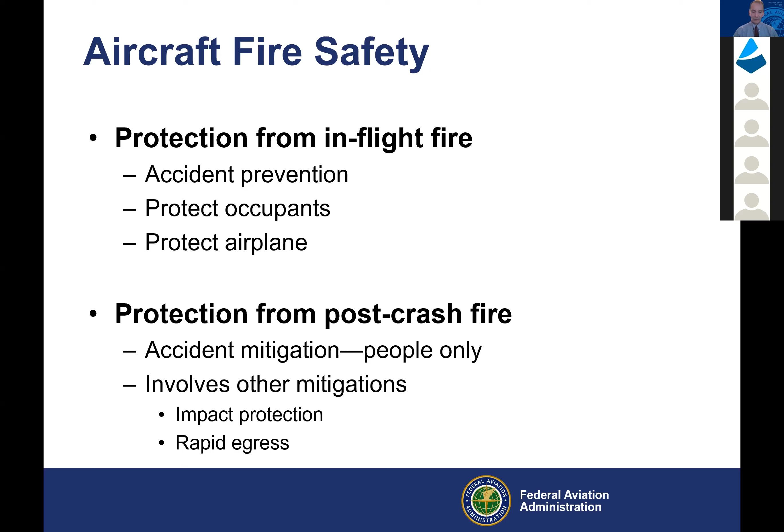And then the other aspect that we look at is a post-crash fire. So now we're kind of assuming that there is an accident, and at that point it's a mitigation strategy. Really, at that point, the airplane is not really all that critical, except insofar as it allows for people's survivability. So if the airplane is at the end of the day destroyed, that's okay, as long as the people are able to survive the accident. This then plays into other mitigations in terms of things like impact protection and the ability to rapidly evacuate an airplane.

So we looked at multiple aspects of fire safety from the perspective of how it provides benefit. The first thing is to minimize the involvement of the materials. If you can keep them from being involved at all, that would obviously be the best objective, but in the real world that may not be practical. So in that case, what we really want to do is prevent the spreading of a fire, from a propagation standpoint, to keep materials, at least try to confine what happens.

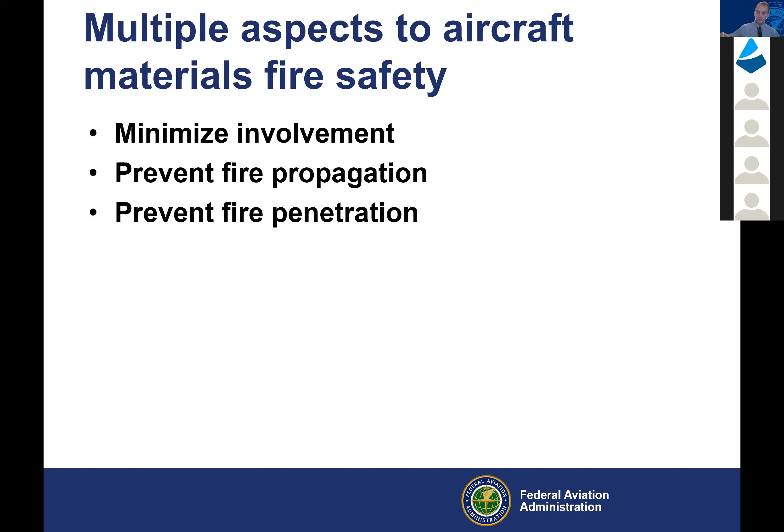So from a regulatory standpoint, there's different ways of approaching that. If you look at the current large airplane, transport airplane standards for the fire properties of materials, they're fairly specific. They have requirements to meet a certain specification or perform a certain test in a certain way. And that's, as long as you know exactly what you're going to be dealing with, and you can predict how things are going to be, that's not a bad way to go, because you can be pretty sure things will be done the way you want them to be done. But in reality, that may not be how things are.

And so there's a benefit - I don't know if that phone is audible in the background, I apologize.

But there's a benefit to having a more performance-based standard, which is to define what is the threat that we want to resist or mitigate. And we want to provide protection that's sufficient to enable, for example, time for people to evacuate. And then if we're really adventurous, you can go to a highly performance-based standard, which just basically says something like, make everything safe. And then the mechanism by which you decide things are safe is defined in some non-regulatory way. But that carries with it other issues and challenges in terms of how to standardize and how to assure that people are in fact doing the diligence that you're after.

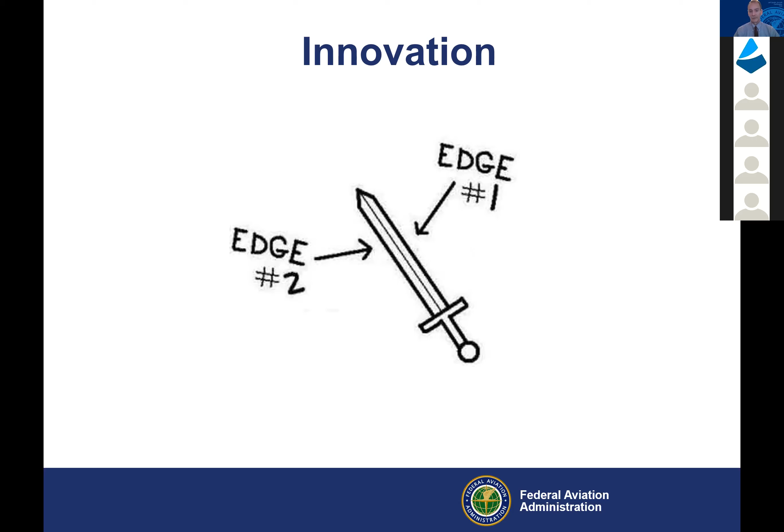So, how does innovation really impact that? There's really two sides to it. Obviously, a lot of innovation improves safety, and is in general just goodness. But the other side is that typically it means the current standards, even if they're performance-based, the means of showing that you're satisfying the standard needs to be revisited. And in some cases, depending on just how innovative something is, that can also be a pretty big challenge.

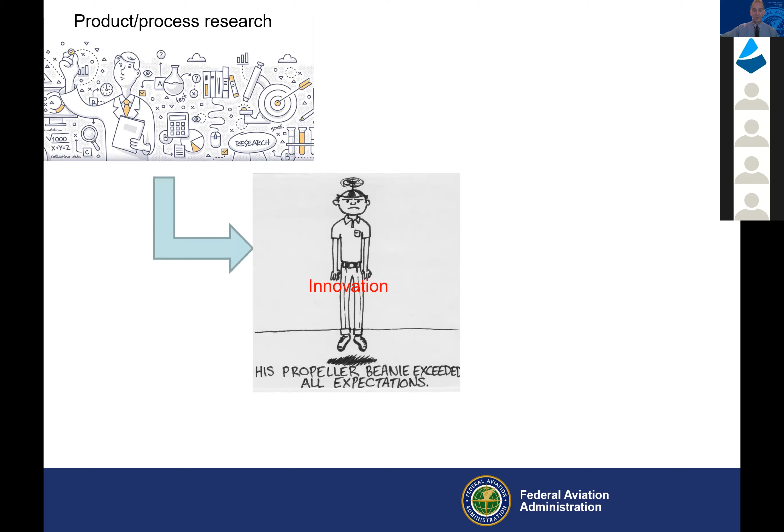So from a standpoint of how the research fits in, the typical process has kind of been that there's research on whatever the new innovative product is. The product gets developed based on that, and then there's additional work that needs to be done, and it may involve further research to develop the safety standards required to accommodate that. And that's not necessarily ideal, because the typical scenario is that the product is done by that time, and you're really trying to play catch up in developing the standards.

So ideally, we would be doing this sort of parallel process where the standards research is taking place along with the product research, and then, to the extent necessary, there can be a little feedback into that product research to help accommodate the standards that are needed. And I think in more recent times, we've had better success doing this than maybe historically. So it's something that we recognize.

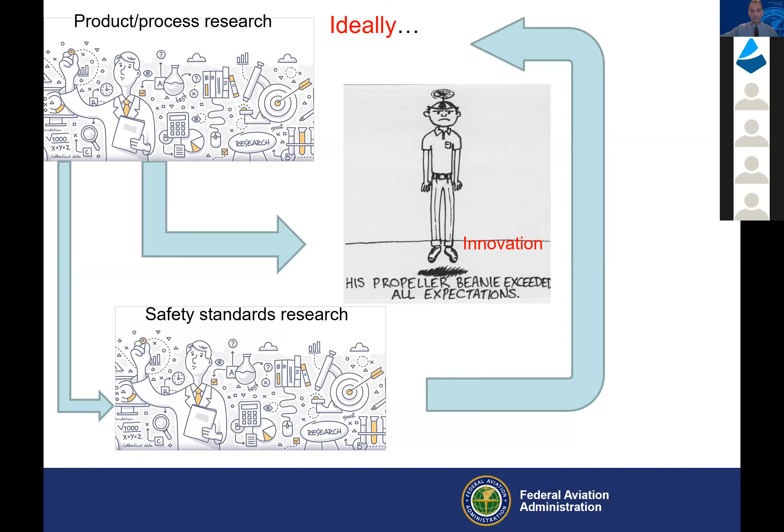It helps a lot if we can follow that sort of path. So from our perspective, the ultimate goal is to produce the right safety standards. And so basically we identify a need. The need can be from different sources, I'll touch on that in a second. We measure what the performance is that's important, and then from that figure out what the standard ought to look like using that knowledge, validate the standard, and then ultimately implement it so that it can be used and the innovative product can be taken advantage of.

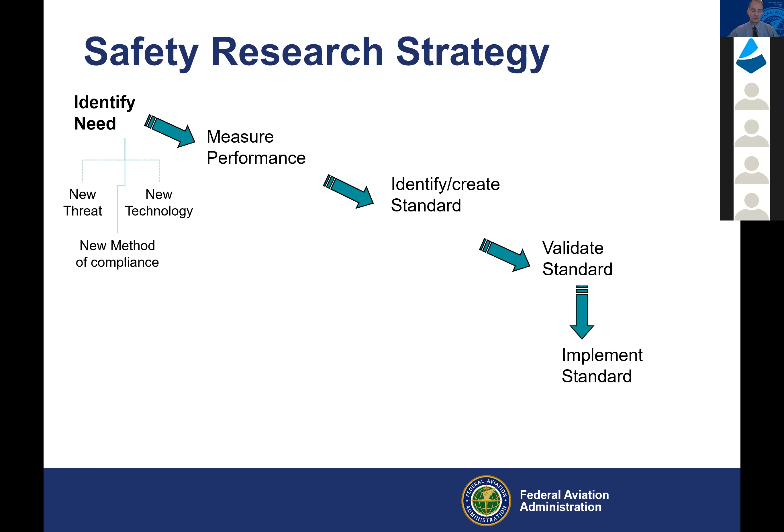This leads to some interesting choices in terms of whether the research that gets done is to meet the requirement, which is to say produce something that satisfies this specific standard, or whether it's done to meet the objective of the requirement. Sometimes those two are the same thing, but sometimes they might not be. My examples there are kind of specific, and maybe for some in the audience may resonate a little bit. But it is a little bit different, and it can be different.

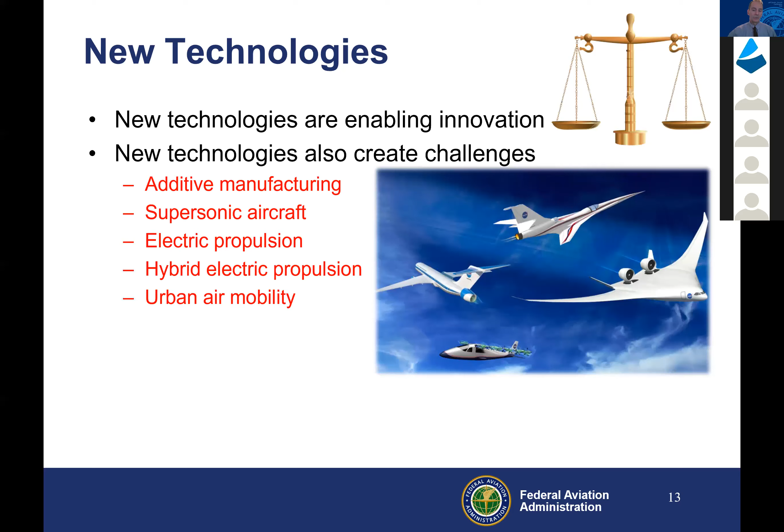Some of the technologies we're looking at that may involve changes to how we look at fire safety - additive manufacturing is an interesting one, I'll touch on that in a minute. But other things that maybe don't have quite as obvious a connection, like supersonic transports, electric propulsion, hybrid electric propulsion, and the concept of urban air mobility - those all may influence how we look at what's necessary for fire safety in the future.

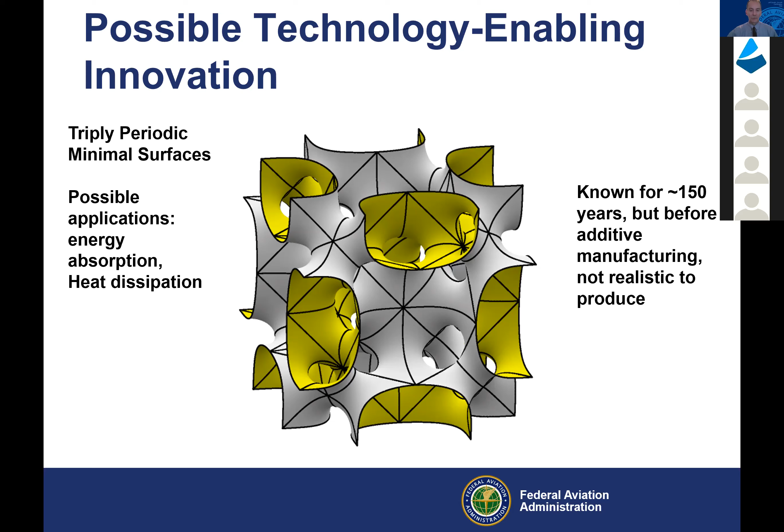I won't spend a lot of time on this because I don't have a lot of time, but I'm kind of fascinated by this whole process of triply periodic minimal surfaces, which is a mathematical entity that's been known for a long time, but the advent of computing and the advent of the ability to produce things through additive manufacturing makes them much more viable as a practical application in the structure. So what could you use them for? Well, it would seem that these things would have potential applicability for using heat transfer, dissipation, or potentially energy absorption, because you're getting a lot of surface area for a minimum amount of material. This may be something that, depending upon how the technology is applied, could be interesting. Depending upon the requirement, I'm not really sure what the coupon should look like for something like that.

New power sources. So currently we base what we think about post-crash fire protection on aviation fuel. But if we don't have aviation fuel, if we have electrical propulsion that's mainly driven by batteries, or for example fuel cells, then that might change pretty dramatically how we look at what is a post-crash fire and what is important in that case. It's the kind of thing that we may have to revisit some of the other requirements to accommodate what we now understand to be the new post-crash condition that maybe we didn't see before.

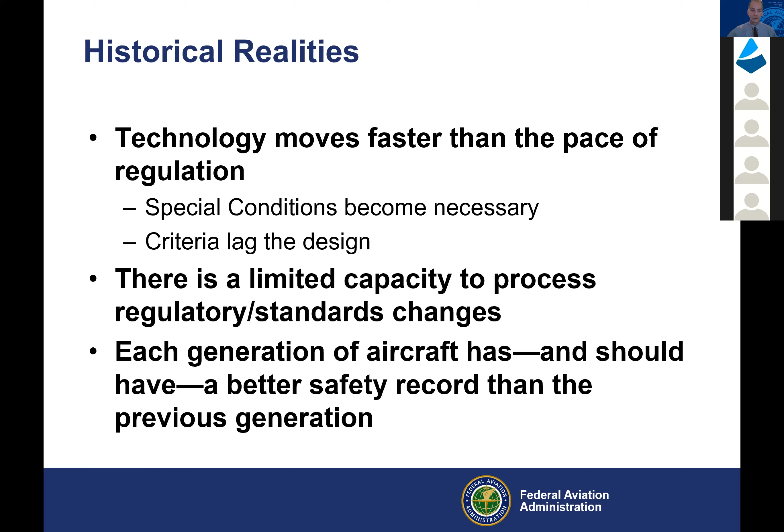In reality, technology is generally moving a lot faster than the pace that we can adopt regulations at. We can use something called special conditions, which are a regulatory tool specific to a given program. It's not ideal, but sometimes we have to do it. Generally speaking, the criteria are going to lag the design, and that's a challenge - a challenge for everybody. There is, frankly, a limited capacity to process standards changes. There's a finite amount of resources available to do that, even though we understand it has to be done. And for the most part, each generation of aircraft has a significantly better safety record than the previous generations, and obviously that's something we definitely want to maintain and potentially improve upon. So to keep up, it is definitely going to be a challenge that I think we're looking forward to meeting.

And when we look at something like this, the meter, if you will, of what is safe enough - the expectations can change in terms of what people consider to be safe enough from year to year. And I think generally we would say that people expect things to be safer than they used to be, and in fact they are.

So there's the other aspect of that, which is, okay, now we have a new mode of operation. What level of safety is appropriate for that? And that's something that's interesting.

It's very tricky to establish what is the appropriate level of safety if we have no history with it. So again, research for us is a foundational need. We look at both what we need to do and what we don't need to do. The drivers, from the standpoint of how things evolve, could be new technology, emerging threats, the state of the art technology. It may be similar technology, but just a refinement of that. And we may find service experience telling us that we need to do certain things. If we have no service experience, that makes it even more challenging.

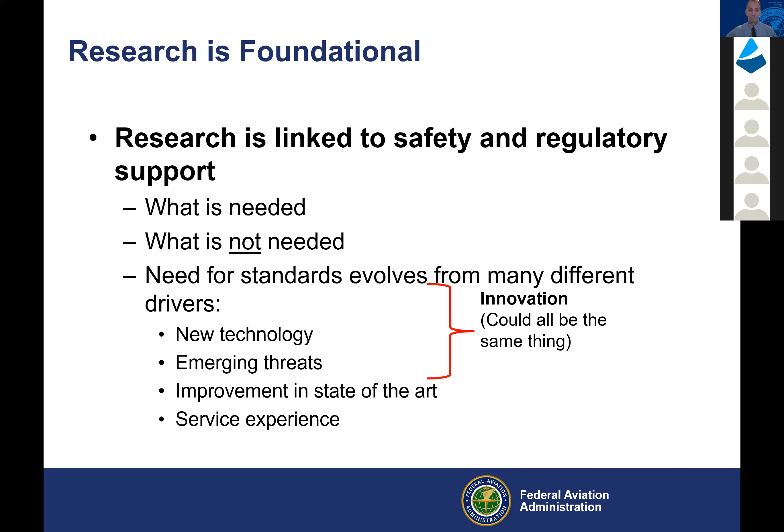So that's kind of what I just covered there, technology. We have certain things that are assumed, but they may not always be true in the future. There can be new threats, things we didn't have to deal with in the past. The environment can change. We might see a lot more air traffic, in which case the statistics will eventually shift on us. Or where airplanes or aircraft operate, if we start flying in between buildings on a relatively frequent basis, that's a different environment than what we've historically seen.

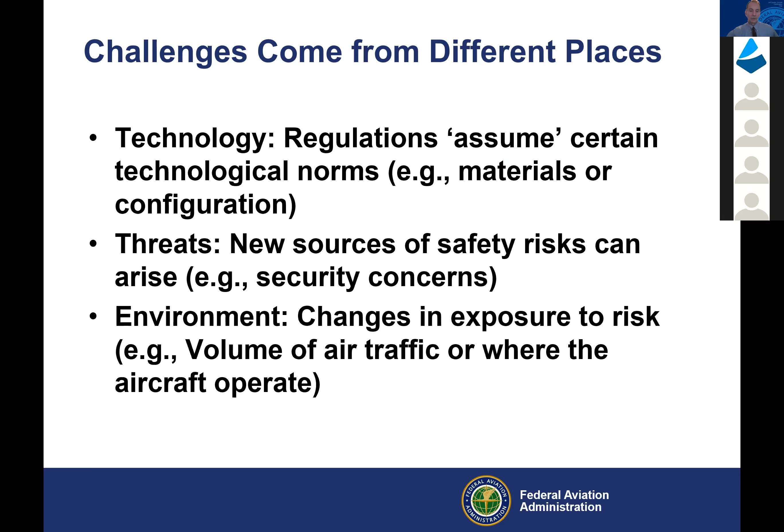So we're trying to, to the extent that we can, maintain awareness, engage, keep up with what's happening. We're attempting to move the standards so that they're defined so people know what it is they're trying to do, but they also have enough flexibility to accommodate things that change. And that is easier said than done, but it's how we're trying to do it.

And it's an international thing. This is really something we have to work across industry and with other regulatory authorities in order to make successful. It's not something that we look at as a US or FAA only activity. It definitely has to be an internationally cooperative venture. And I think I've exhausted my time plus a little bit. So thank you very much for your attention.

Thank you, Jeff. I really appreciate the overview presentation. I think we have time for one question or maybe two. So I'm going to ask you, what do you see as the biggest challenge in keeping the regulatory standards relevant in light of technological developments?

Yeah, I think it's going to be keeping sufficient detail in the standard so that it's clear that people can look at the standard and understand what they need to achieve with it, but also give it enough flexibility so that when there is a shift in technology or in the method of or the mode of operation, that it's still accommodated. We're looking at that right now to figure out the best way to do it, because we can see a lot of things coming that don't fit as neatly into what we have currently on the books. So I think it's really going to be moving us to language that's performance-based enough that it allows for shifts in these different areas, but still says enough that it's clear what the objectives are.

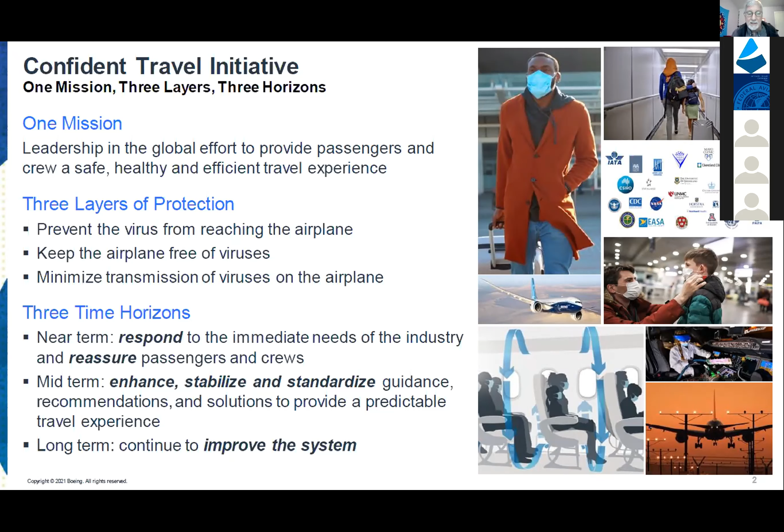This is just a single slide - there's so much about confident travel, I don't have time to cover it all. Basically, it's a more comprehensive approach to safety in air travel. There are different groups within confident travel, such as the group I'm in, looking at UVC disinfection, but we also looked at antimicrobial coatings, disinfecting solutions, and fogging. In addition, there's other things like check-in, self-evaluation, and enhanced procedures. So that gives you an idea of the scope and magnitude of what we're involved with.

Now let's talk about what we're involved with right here, which is using UVC light to disinfect a surface. What is UVC light? UVC light is basically a range of wavelengths between 200 nanometers and 280 nanometers.

We've been using this for years for surface disinfection. In fact, the 254 nanometer emission, for example by a low pressure mercury lamp, has been used for decades for surface disinfection. The issue with 254 is that the photon has a lot of energy - enough to break bonds, enough to kill viruses, but it also penetrates into tissue, specifically mammalian tissue.

What attracted us about the 222 nanometer light is that the 222 nanometer photon, while higher energy than 254, is so strongly absorbed that it can only penetrate mammalian tissues maybe a couple of micrometers at the very most. With the 254 nanometer photon, it penetrates through the membrane into the nucleus, causing DNA damage and mutagenic effects.

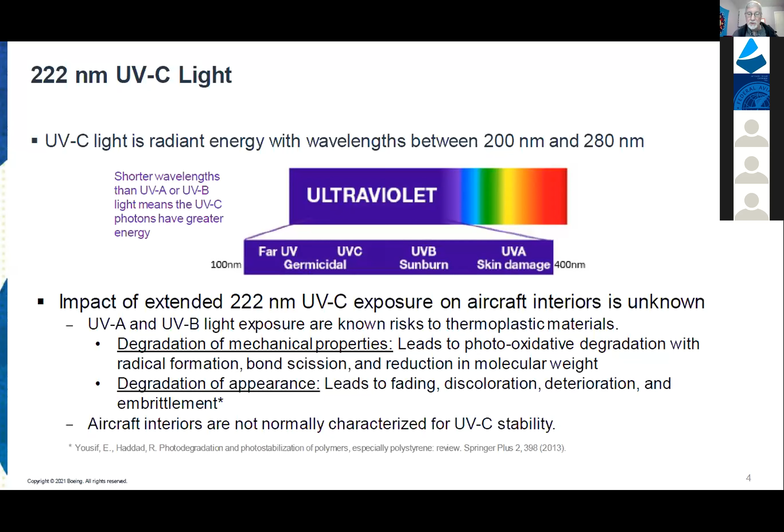So what did we want to do? We wanted to develop a system - it really is a system - to disinfect the inside of an aircraft, in particular key surfaces: galley, lavatory, main cabin, even working with the flight deck. This presentation is only focused on the main cabin, the galley, the lavatory, and the crew rest, because our inputs were basically a set of materials selected from those areas.

In addition, we worked with a very clever, very smart team of individuals who put together a robust light source with an emission centered at 222 nanometers. Specifically, it's a krypton chloride excimer lamp. We expose samples in a manner that simulates 25 years of in-service use.

And what do I mean by 25 years? I'm going to show you. We have to make some assumptions, so there's a little bit of tutoring here on various terms and meanings.

The output, of course, was: after exposure simulating maybe 20 to 25 years of in-service disinfection, what's the impact on performance - mechanical properties, visual properties, and it's not listed but I need to list it - flammability properties. I'll be talking about that.

Okay, so here's just a quick snapshot. Inside the cabin, what did we choose? Well, obviously, high-touch surfaces that might be touched by individuals and lead to fomite transmission. So you're talking about windows, tray tables, armrests.

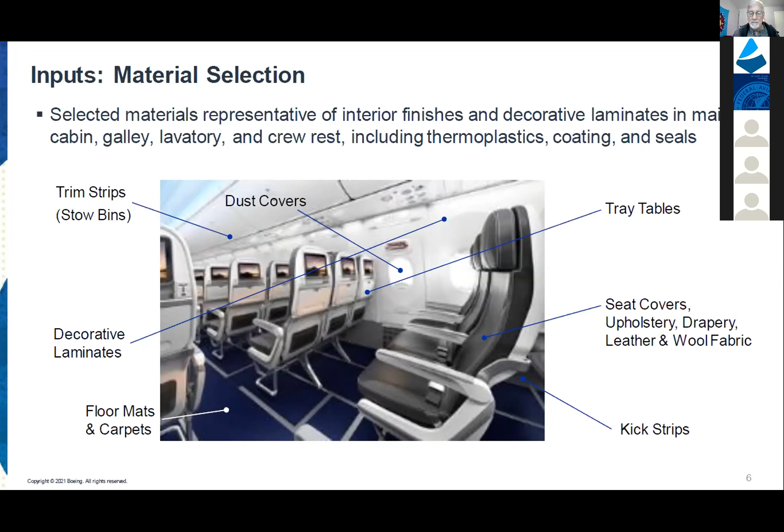Okay, so now some quick lessons on photophysics. Essentially, how do we go about a study where we need to quantify the amount of light delivered and the amount of light received?

So when you have a lamp, you turn it on, it emits light. Our krypton chloride lamps emit, and it has an intensity. Another name for intensity is irradiance. Think of that as the number of photons per second per unit area, in this case a square centimeter. So that's the amount of light delivered, and the units are milliwatts per square centimeter. Another way of looking at a milliwatt per square centimeter is a millijoule per second per square centimeter. And that's how we get to the amount of light delivered.

So assume, just as an example, that the irradiance of the lamp is 1 milliwatt per square centimeter, and we hold it over this area. Assume that dashed line is just a square centimeter, use your imagination. If we hold it over that for 10 seconds, we now have 10 millijoules of radiant energy absorbed by that surface.

This is something that we routinely recorded and measured using a commercially available power meter from Thorlabs. In our particular study, the lamp irradiance from our lamps ranged between 1 milliwatt per square centimeter and 1.5 milliwatts. We typically recorded the irradiance along the long axis of the lamp, and we had samples within roughly about 2 inches from the lamp.

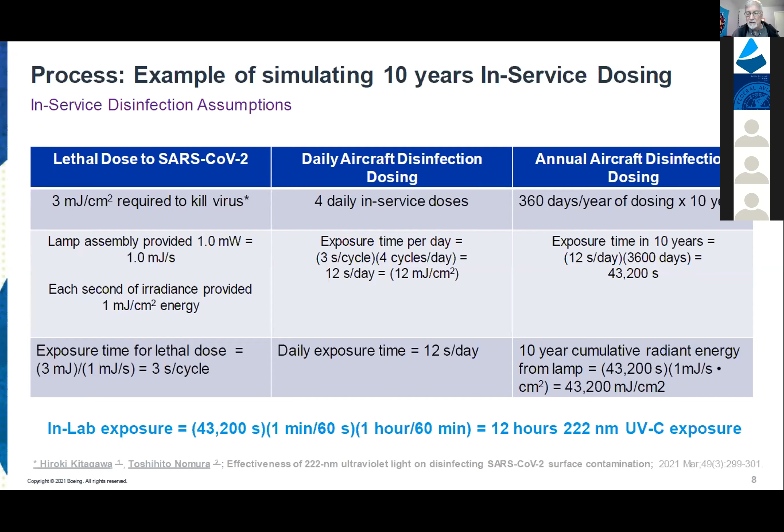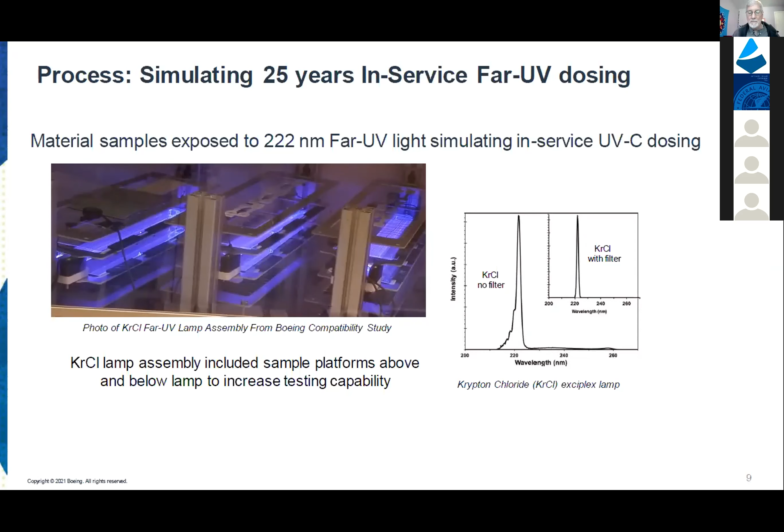Those are only 3 lamps. We actually used 6 lamps. Nevertheless, there was a lot of turnover. We tested a lot of samples and exposed them. Okay, that was tedious, but it was very, very important.

So once we did the exposure, what did we do next? We performed performance testing, and that's typically mechanical testing, such as tensile. We did elongation, we did compression. We also did things like breaking strength and abrasion resistance, such as the Martindale method for textiles.

Now I'm going to summarize first thermoplastics. Samples included things from tray tables, kick strips, rub strips, floor mats, dust covers, finishes, the lot. And what was interesting is we did not see anything. We only had one sample material, it was a polyurethane, and its compressive strength, I think, dropped a little bit. It was statistically significant, but well above the requirement. Everything else was basically equivalent. We did not see any impact whatsoever.

That's mechanical. Now for visual, we saw a range of results, everything from hardly any change where you couldn't tell to something that had gone from bright white to severely yellow, almost brown. And then flammability was my biggest concern because, as you know, in the additive industry, you add these, basically they're going to be throughout the sample. And I worried about oxidative degradation and the impact of oxidative degradation on additives that are at the surface. How would that affect something like vertical Bunsen burner on a sample that normally would easily pass?

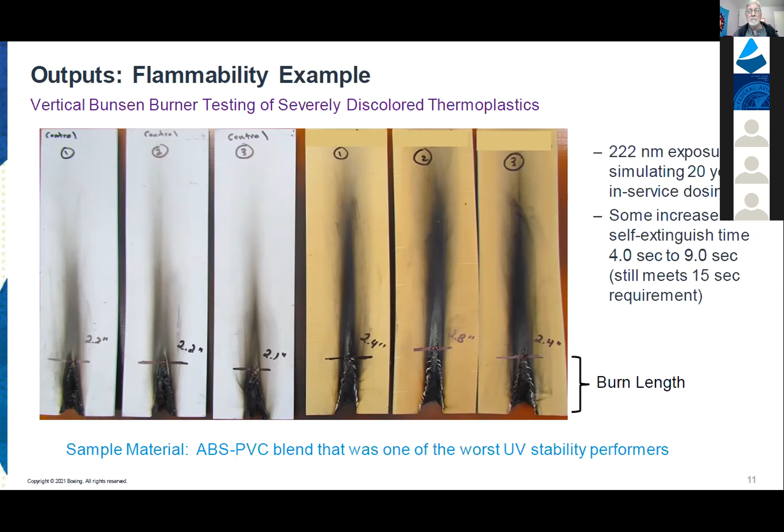I think on the right you're going to see something like 2.6 average, roughly. We did this at 20 years here, and we did it again at 30 years, roughly the same. On the left-hand side, that was the control without any exposure, roughly around 2.2 inches of burn length. The self-extinguishing time did become longer: it was 4.0 seconds on the control, and it was 9 seconds on the one that had been exposed. I think we did have one that was 7 seconds, but also on that second test at 30 years, I think the controls actually self-extinguished almost right away. So there is a little bit of a difference there. Nevertheless, there's still a fair amount of margin between the requirement and how they actually performed.

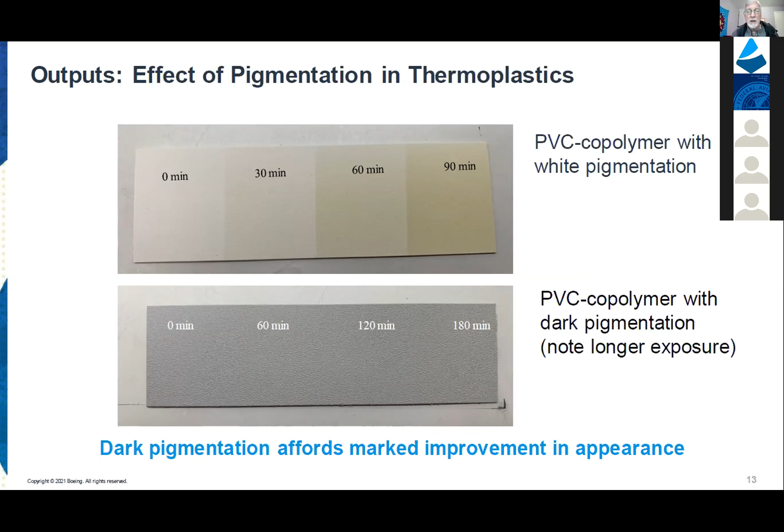If you take that same tray table material and you incorporate a dark pigmentation, look at the change. We even doubled the exposure times. We wanted to see what the rate was over a short period, and that's why this slide is in there. You can really see that on some of the really fast-acting, fast-degrading materials, it's pretty significant. But the surprise was the impact of dark pigmentation, which when I thought about it makes sense because it's probably absorbing a lot of the extra light.

Textiles, I have to show one slide just to say we did it. Again, no impact that we could find. We accidentally ran a sample out to 168 hours, and that's the abrasion study on that seat fabric. So, unless you... yeah, I can't find anything. Basically, we shot at it as many times as we could, we couldn't really destroy it. So that's a good thing.

So, recommendations going forward. Well, we still are looking at flammability. We're actually now working in a collaborative effort with the IUVA on a large group of companies looking at a more fundamental study, maybe even a slightly wider group of polymers. Our first phase will be basically polymers without pigment, and then we'll do the pigmented stuff that's being used. So stay tuned on that, that's ongoing.

But we also have to look at this as an opportunity. We need to work with the industry to maybe look at ways to make some of our real good thermoplastics more thermal stable. So that's something that we're going to need if we adopt this method and it gets used with some regularity.

The other thing is for our designers here at Boeing, I'm saying, look, if at all possible, if you can design parts using the PVF, the polyamide, the nylon, or the polypropylene, if there's not an issue with flammability, and there can be, but on some applications you only need to meet vertical Bunsen burner, and so that's good. PVF is never an issue, but let's use those if we possibly can.

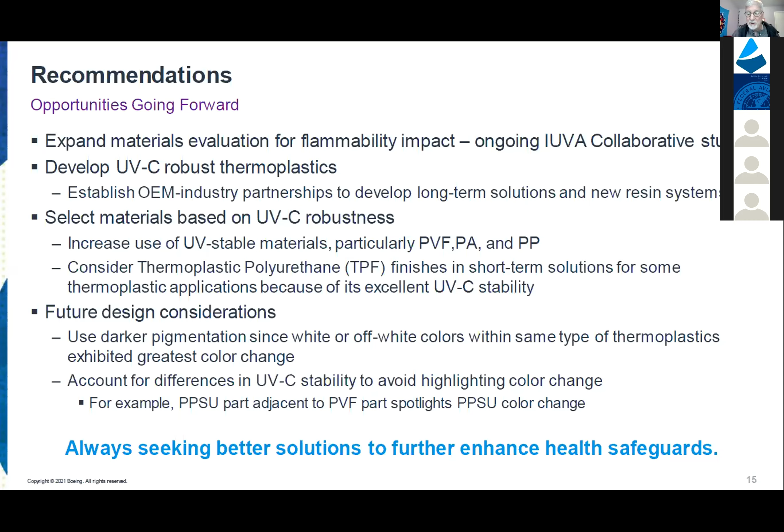All right, so I'd like to introduce our next speaker, Tom Fabian. He's the Global Technical and Innovation Manager at Underwriter Laboratories, and he's going to be discussing a very interesting topic: influence of 3D printing on safety critical properties, FR and electrical testing parameters.

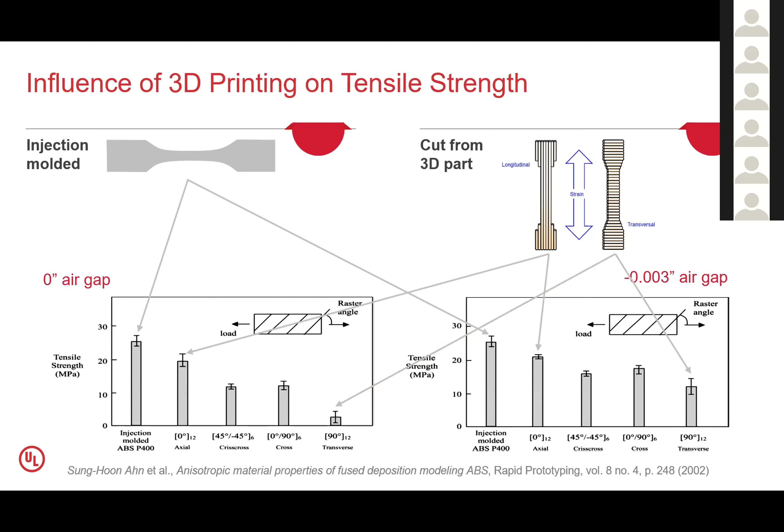If we see this showing up in mechanical properties, what happens with flammability, where surface roughness can lead to greater attachment of flame? In the channels created between the deposited lines, could that act as a chimney and accelerate flame growth within the interior if it's breached? That's really where our questions were coming in at UL: how do electrical properties, ignition properties, and flammability properties of 3D printed materials compare to injection molded parts?

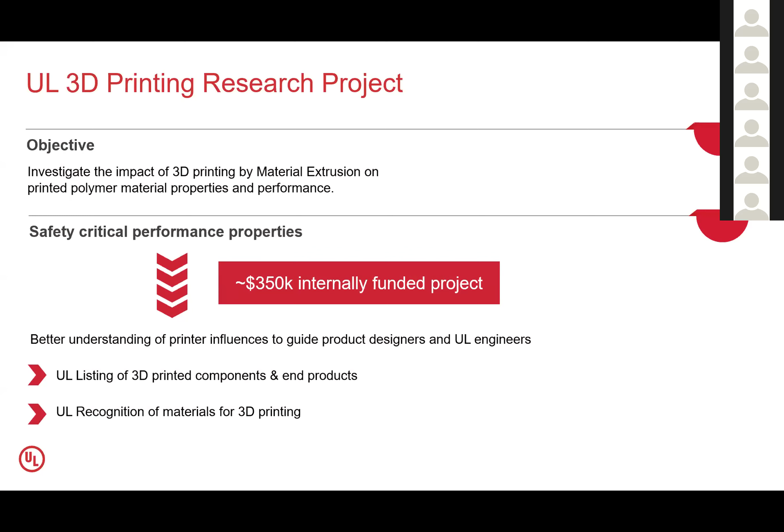So we set out to do a study looking at these aspects internally—an internally funded study. We wanted to understand how those properties are impacted, and what that means in terms of material recognition programs and product certifications, and how we extend from traditional manufacturing to 3D printed.

To provide an overview of our research, we focused on two materials that we could find. We found a flame retardant modified ABS material marketed as a V0 rated material, and we used a $4,000 desktop printer for printing that material. We also looked at polyetherimide, an inherently flame retardant material frequently used in aerospace, which requires more control and more severe conditions to print than ABS. So we used a $45,000 industrial printer.

We wanted to focus on the key factors a user can adjust—not all the different factors that impact 3D printing, but just build orientation (the direction we're printing), raster angle (the angle of adjacently layered materials), air gap (how close adjacent deposits are placed), and layer thickness, using the tip size of our material extrusion 3D printer to guide that. We looked at a full factorial, centered design of experiment to examine these different factors.

We took it one step further, taking our filament to our lab, chopping it into pellets, and then injection molding those pellets. So now we've got injection molded material made from the same feedstock as our 3D printed filament parts. We then looked at a number of different electrical, ignition, and flammability properties: dielectric strength, volume resistivity, comparative tracking index, high current arc ignition, hot wire ignition, and UL94 flammability.

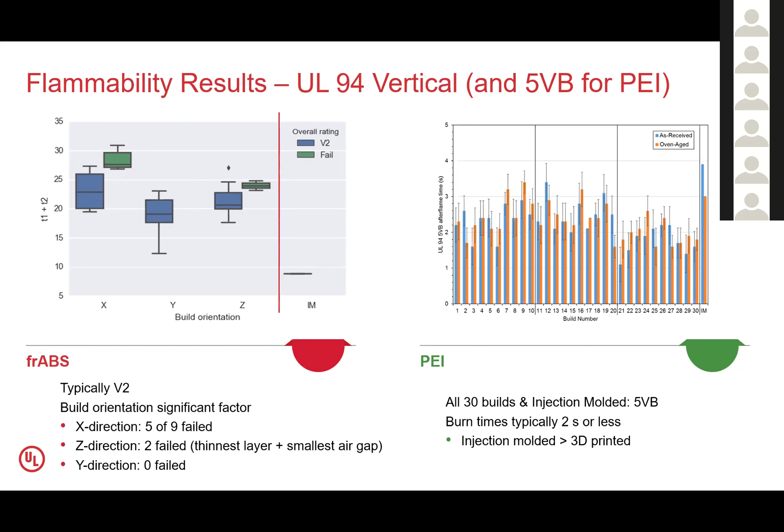What we believe is happening here is that the greater surface area of that 3D printing is allowing the imide moiety to interfere in the combustion kinetics at a faster rate than in the injection molded smooth sample, and that's where we're getting a slightly shorter burn time. Compare that to the ABS samples where that greater surface area is allowing that inherently flammable material to burn at a faster rate. So again, build orientation is a significant factor though.

When we look at high current arc ignition, this is simulating between two live components, there may be some arc occurring like a switch, for instance. So we're looking for up to 150 arcs being subjected to the surface of the material - will it cause the material to ignite? We found with the ABS material, regardless of how we printed it, or if it was injection molded, none of our specimens ignited. So they all get the best rating, best performance level categorization, which is great.

With the polyether imide, again, we saw a very similar type of behavior. Out of the 150 specimens that we tested that were 3D printed, 3 of the 150 did ignite. Again, it was at such a high number of arcs occurring that it still leaves that print as being considered the best performing category. So we can look at 3D printing where it was significant on flammability tests - on a high current arc ignition test, we don't see a significant result impacted by 3D printing.

If I look at hot wire index or glow wire index as being a similar type of test, where we're applying an energized nichrome wire to our specimen and looking for the time to ignition, we are again starting to see results. All of our ABS samples, probably not too surprising, melt and drip away from the nichrome wire, so it would, by definition of the standard, get the best result.

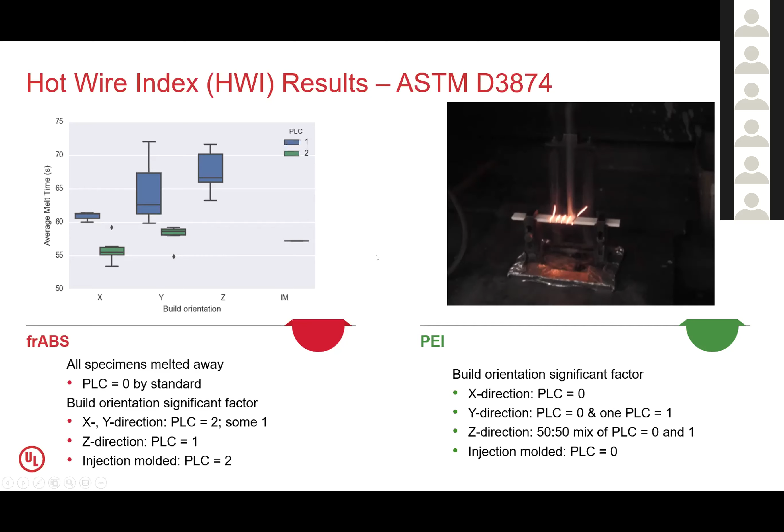Now it's really starting to say it depends on how the parts are being printed that are going to be used. So again, it's a very critical question that's coming up. So I'm going to jump to comparative tracking index. This is a test where the surface is being contaminated and we're looking for potential arcing to occur, or tracking from one live element to another live element, or in this case, electrodes.

Nominally, this test is conducted on a smooth surface that is free of surface imperfections. When we look at many of our 3D printing techniques, you have an inherent surface texture that is being put onto that material. How that surface texture can impact the results of this test comes about by the liquid that is being dropped between these electrodes to create that tracking bridge.

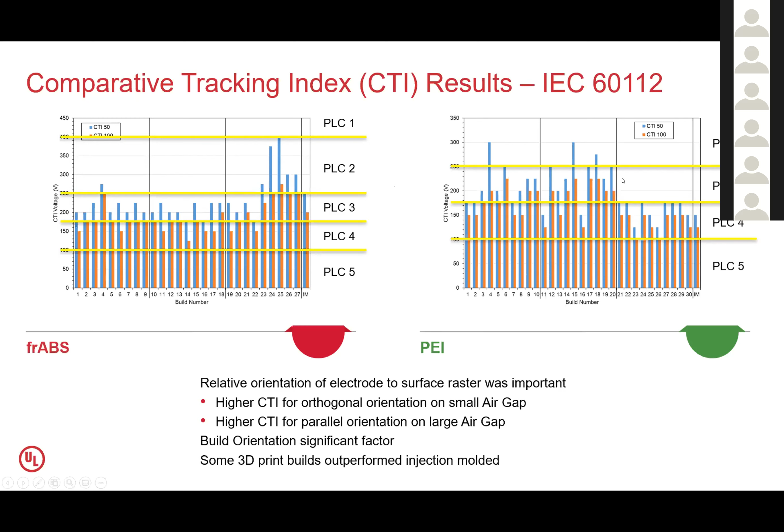So I'm going to try and summarize here. First, we do see injection molding does give us more consistent dimensions than the 3D printed, and this makes sense from having a fixed volume cavity versus an open volume build.

If you don't take anything else away, this is probably the most critical one: the build settings do influence the results. That same material on the same printer can yield critically different performance. We saw that with the flammability, with the comparative tracking index, with volume resistivity, with dielectric strength, with the hot wire ignition. In every case, we're seeing that if I take that material, I can alter my performance depending on how I print it.

So that becomes really critical and has a big impact when we look at what does this mean for products that are being 3D printed and how should they be assessed for safety.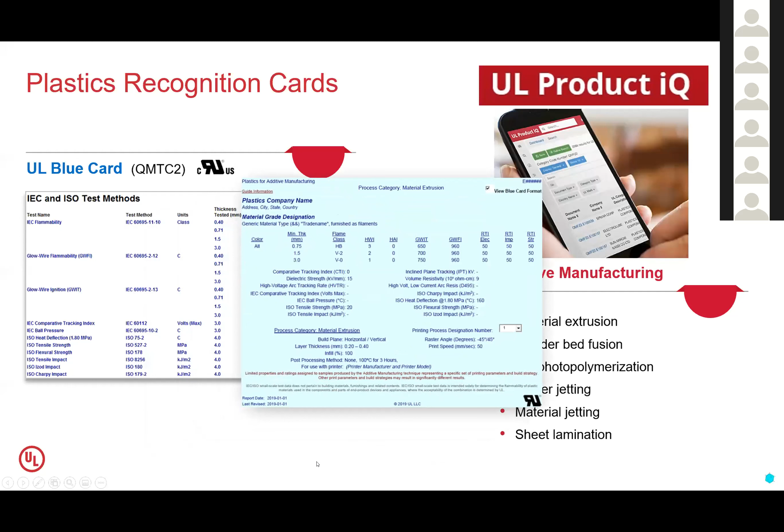I list out the 6 different techniques that are used for plastic materials, and I'll give a brief overview of what a blue card captures to serve that same function as the yellow card. Just like the yellow card, we're still keeping the plastic and the grade name and the performance characteristics all in the top portion. When we get into the bottom portion, now is where the difference is coming in.

First, we're indicating what processing technology is being used for 3D printing. The different techniques will rely on different aspects. What are the user controllable parameters that are being used to make these samples that are evaluated? The build plane, the layer thickness, the infill, the raster angle, the print speed. These are all settings that you as a user can typically alter when you're printing.

Finally, is any post-processing required? Material extrusion, you might not need post-processing. Vat photopolymerization, if you don't do post-processing, you're going to end up with a gooey mess at some point.

Finally, I mentioned the model printer. Printer models do matter. We have found that even when we use the same parameters and the same material, we will get different results depending on the model of printer because of how they work. So that becomes a significant factor.

So the end result of what we're capturing on a blue card is: if I use this grade of material on this printer and I use this printing parameter combination, then these are the results that can be expected. So we're going back to the same purpose as what the yellow card serves, of being able to predict what the properties are to allow the engineers to use those properties for their design purposes.

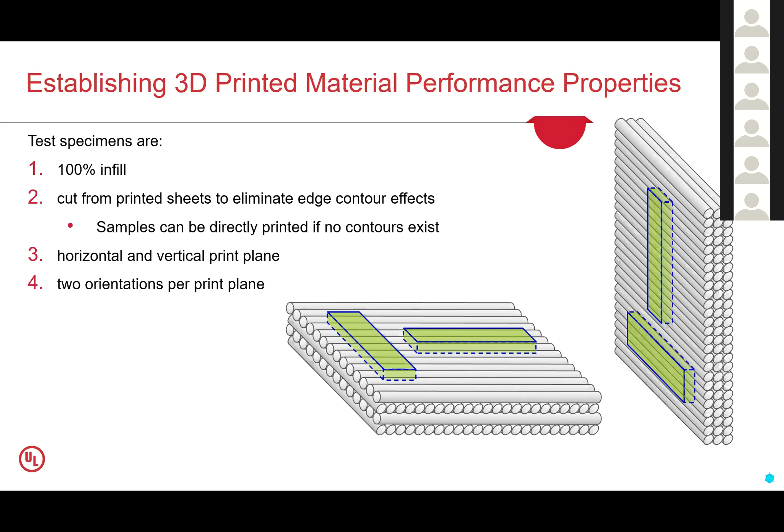So now that we have a nice technique for capturing that information, we can go into looking at how we certify a 3D printed product or component. First, we have to acknowledge that ultimately it's the performance of that component that matters. It doesn't matter how we made that component, but whether that component is performing. So the performance requirements are the same, whether it's 3D printed or made through traditional manufacturing.

That does not change. If the material has been 3D printed using a blue card recognized material, we can ascertain whether it was printed using the same parameters and model printer as what's listed on the blue card, in which case we can expect that performance as reported on the blue card, and it can be assessed based on it. If not, we treat it just like any other injection molded part using an unlisted material, where we're going to do the material performance test also.

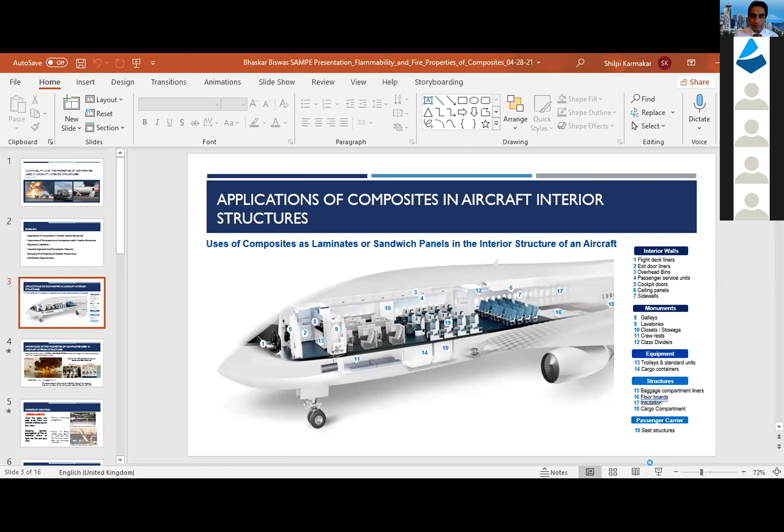So, if an aircraft catches fire and the fire has somehow got slower propagation, then it may allow time for passengers to evacuate. Therefore, the overall aim for the present manufacturer is to improve fire resistance of aircraft through preventing ignition and propagation of fire. Before I go into details, I would like to give an overview of the presentation.

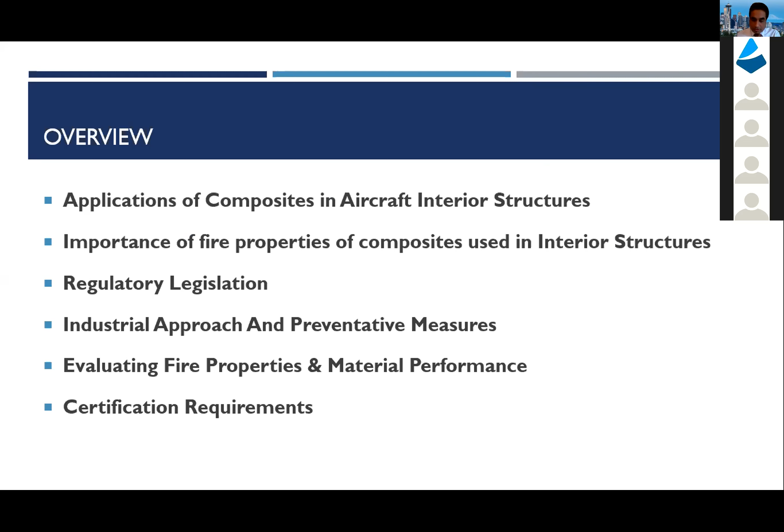Now, the first one: application of composites in aircraft interior structure. Since composites are known for high strength-to-weight characteristics, application of composites in aircraft has been growing significantly in order to improve fuel efficiency. As can be seen from the current slide, composites are used in interior walls, monuments, some equipment, some structures, and in passenger carriers. Here are some examples for each application. As you can see, composites are widely used in aircraft.

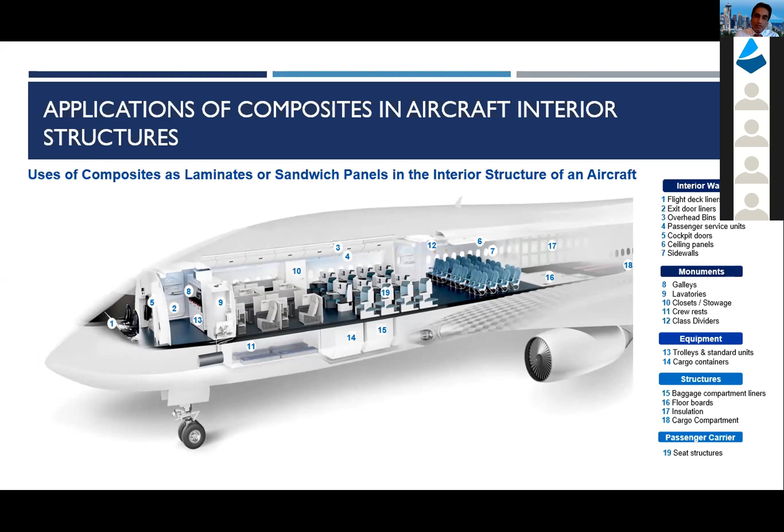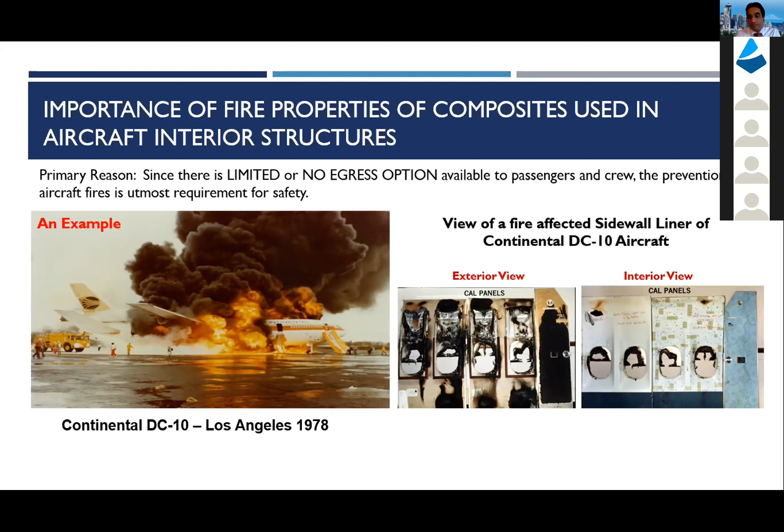As learned from many aircraft incidents that happened due to fire, an important control for reduction of the effect of fire is to delay ignition and propagation of fire, so that it will allow time to fight the fire and save lives. So, two prerequisite missions are taken into consideration in order to improve fire safety.

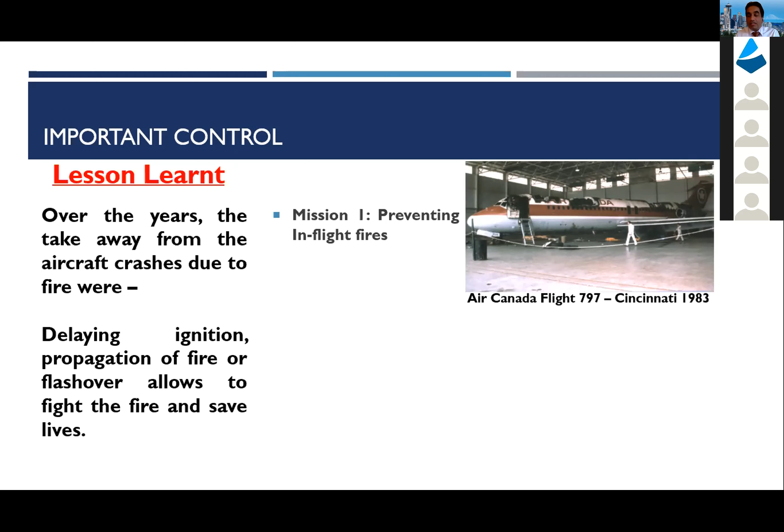So in order to pursue this mission in practice, enforcement was required to make sure all the components are safe, and that has to be done at the manufacturing level. This has led many aviation agencies to come up with regulatory requirements. Agencies like the federal government have come up with legislation through Code of Federal Regulations, where Title 14 CFR covers aeronautics and space, and part 25 of that CFR includes the regulation for fire safety.

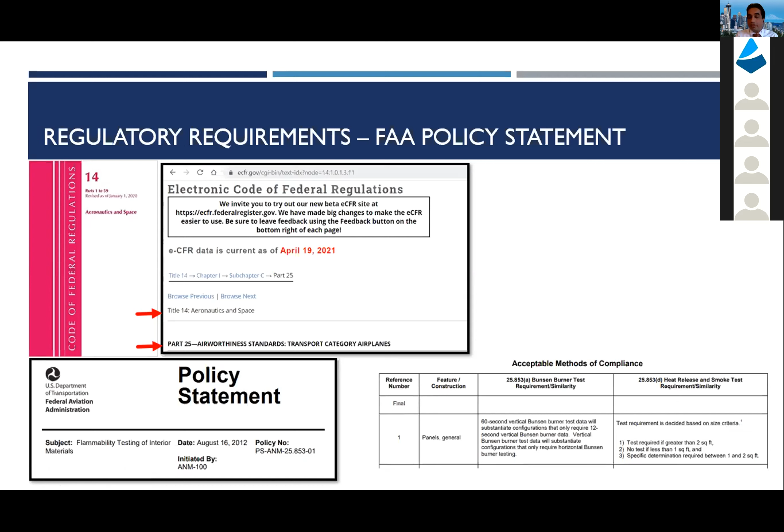So in order to support the regulation and support the manufacturer, FAA also came up with a policy statement, which is a method of compliance, and it dictates how to meet regulatory requirements. Here is an example of a panel. The policy statement says the panel must pass the Bunsen burner test, and also it has to meet heat release requirement and smoke density requirement. Similarly, there are other 25 components used in aircraft, and the policy statement gives details for each of them on how to meet this requirement.

Since the regulatory requirement is stringent, industries had to take pragmatic approaches to meet this requirement. The very typical approach is to use materials that are inherently fire retardant, typically phenolic resin and composites made from phenolic resins. Also, by selecting materials that have a higher autoignition temperature than service temperature, and by using non-flammable material where possible. Sometimes it is possible to mask components with fire retarding material, and also sometimes it is done through changing design that allows a reduction of fire-prone material. And the last one is to impart fire retarding characteristics to non-complying polymeric material using fire retardant chemicals.

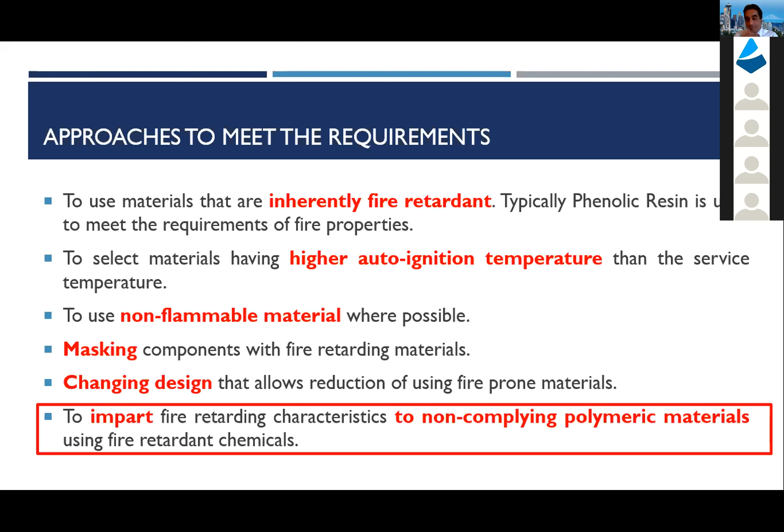And this one is very important because there are some polymers which are very demanding and cannot be used in aircraft because of the lack of fire resistance property. And for those polymers, these steps are taken in order to improve the fire resistance properties of the material.

So as mentioned in the previous slide, industries do fire retardation of materials, and the reason for that is mainly three reasons. The first reason is it provides thermal stability to the material, meaning resistance against heat generated from fire. The second one is it helps to hold the integrity of the composite, meaning it may ensure the material doesn't degrade, disintegrate, or fall off. And the last one is isolation of fire in order to reduce the intensity of burning.

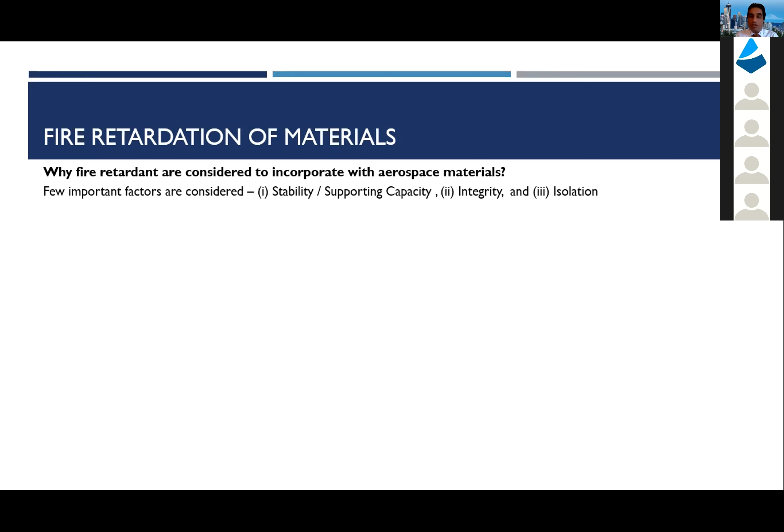There are different types of fire retardant, and it is not easy to select which one to use for the material. That's why sometimes it is difficult for industries, and industries come up with a strategic process, which is the material selection process and process selection process.

The very first process industries take is the material selection process. In this selection process, the first consideration is fire safety of the material, then manufacturability of the material in order to ensure it can be processed consistently over time. The third one is component specification to ensure it meets all the design requirements. And the last one is customer specification to ensure any additional requirements from the customer are met.

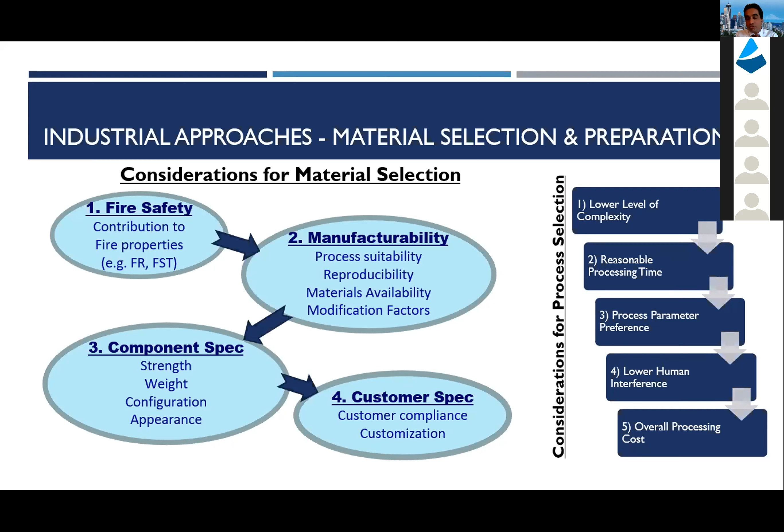Upon completion of formulation and modification of the polymer, it is important to ensure which test technique to be used for the assessment of fire performance of the material. The current slide shows there are a number of tests that can be used for assessing fire performance of material.

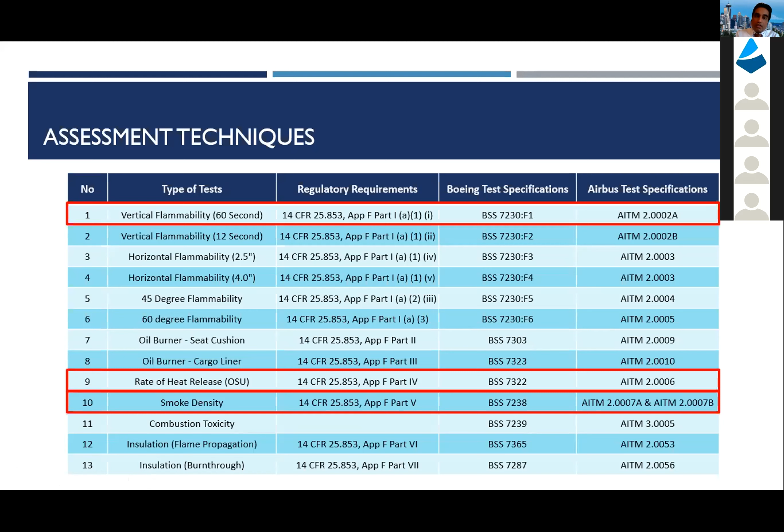Here are the types of tests, and each of these tests complies with respective regulatory requirements. OEMs like Boeing and Airbus have their own test specifications, and each of these test specifications meets respective regulatory requirements. For composites, there are mainly three tests used: the 60-second vertical burn, OSU heat release rate measurement, and smoke density measurement. The following slide will give more detail on these three tests.

Before starting any test, it is important to make sure what type of material or sample construction is used, in order to get more accurate information from the test. The typical constructions used are monolithic laminate construction and sandwich panel construction. In monolithic laminates, mainly 2-ply and 4 to 6-ply laminates are used, whereas in sandwich panels, 1-ply core with 1/8 inch panel, and 2-ply core with 1/2 inch panel are used.

In the test, first it goes through the flammability test, where the sample dimension is 12-inch by 3-inch for the coupon, and the 12-inch side is held vertically. Here is an example of a vertical flammability chamber, and the information collected from it includes burning time, burning length, and drip extinguishing time.

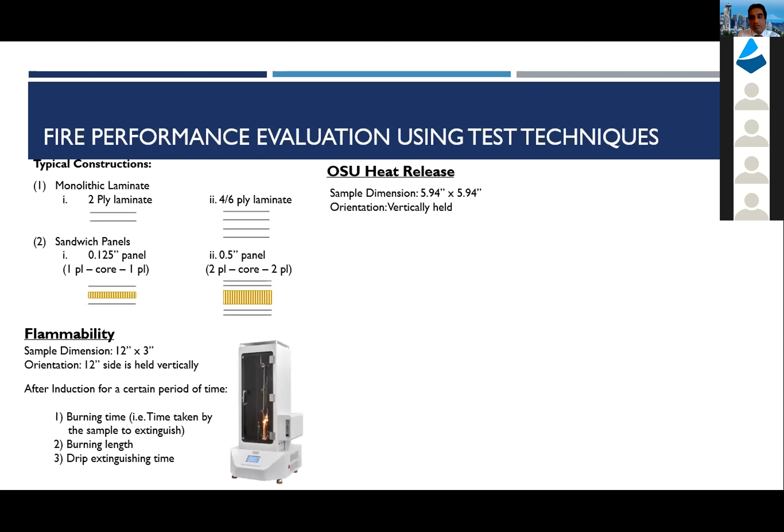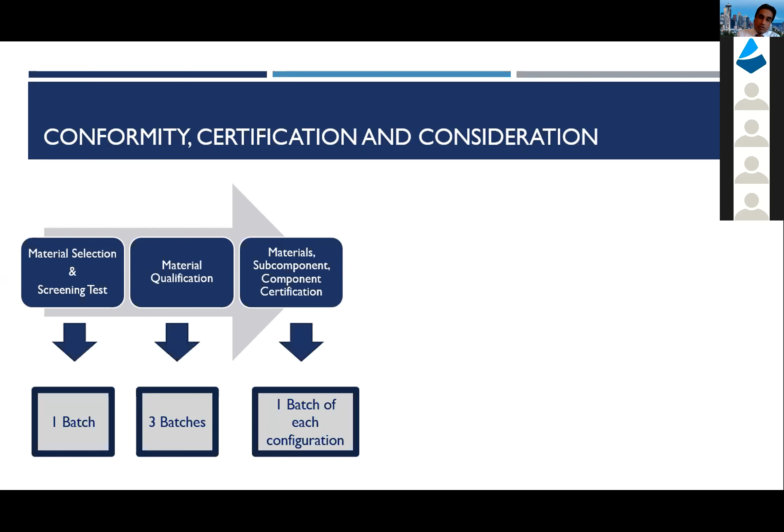Materials are also tested at different levels of structural assembly, from material to subcomponent and at component level. The qualifying requirements at lower levels of structural assembly are tighter compared to those at the final assembly level, as you can see from this table.

Finally, since fire safety is the highest priority for aircraft interior part manufacturers, painstaking processes are performed for composite components in order to ensure the safety of the aircraft, and hence the safety of crew and passengers.

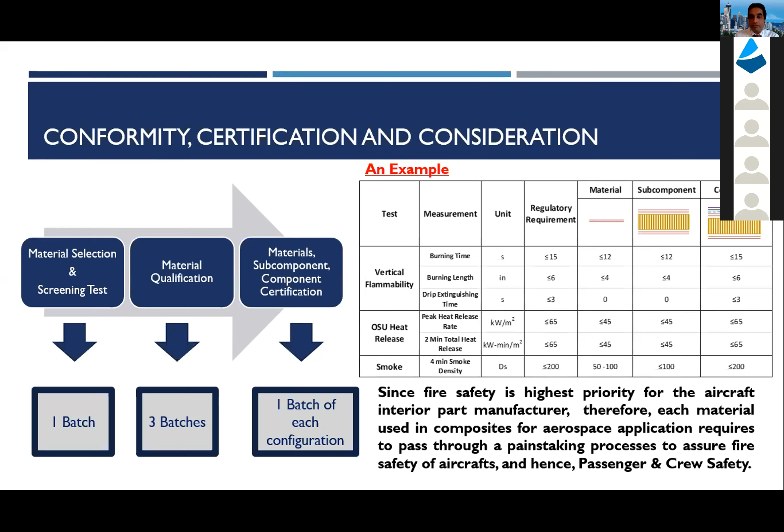Thank you, Bhaskar. I'm going to give you one question. We don't... oh wait a minute, here's a question from the group. Let me give you that one. Okay.

So why are the typical constructions of laminates and panels considered for the fire testing?

I'd like to go back to the particular slide to show this. If you see, the constructions used are 2-ply laminate and 4 to 6-ply laminate. A 2-ply laminate is the worst case scenario; it catches fire very quickly and burns very fast. That's why we consider the thin laminate as the worst case scenario, whereas 4 to 6 plies are quite common in application, which is why we use monolithic laminate construction this way. For sandwich panels, the 1/8 inch panel with 1 ply is thin and also the worst case scenario, while the 1/2 inch panel is quite common for application. That's why we take this type of construction for the test.

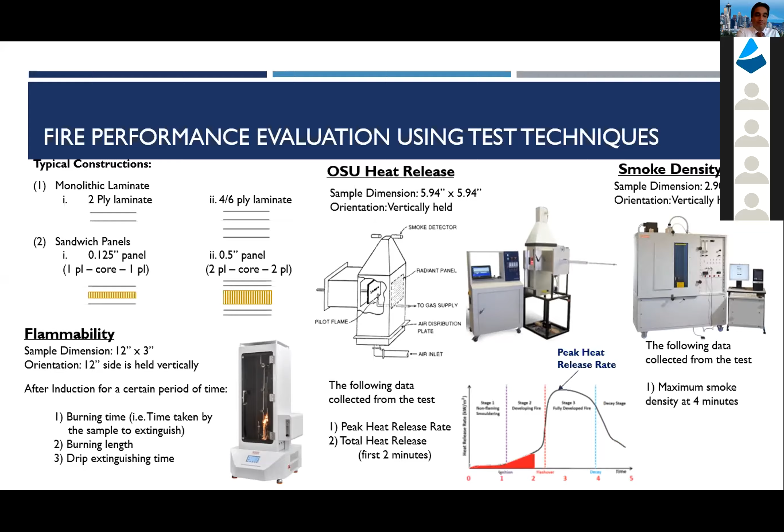Thank you, Bhaskar. Will you hang in there with us till the end in case there's some additional questions? Will you be able to stay?

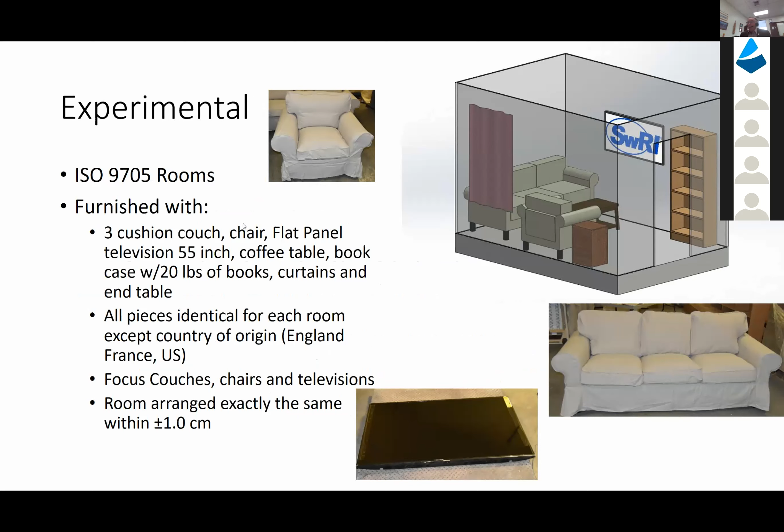All the cribs were placed in the same location on the couch, in the center cushion towards the back. We performed a lot of different analytical work. We collected smoke and did a lot of studies on it, but we also looked at heat release rate through oxygen consumption calorimetry, measured smoke through light obscuration, and collected video and infrared evidence.

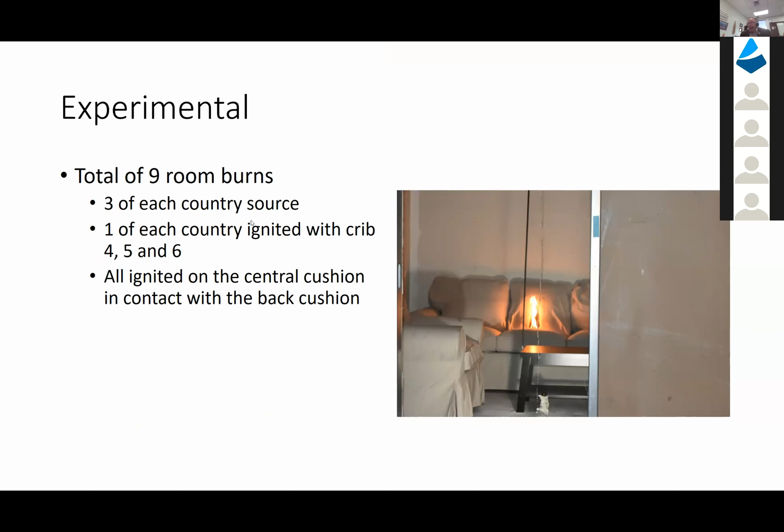So a total of 9 rooms, 3 for each country, each ignited with a crib 4, 5, or 6, and all ignitions were on that central cushion.

So I'm going to show you what this looks like in the same time frame of simultaneous burns. You have, as shown, US, Great Britain, and France located from left to right, all on the same time scale. You're already in flashover on the two outer edges, whereas the fire is slowly growing in the middle. As soon as it reaches the edge of the cushion, the surface area starts to accelerate the burn.

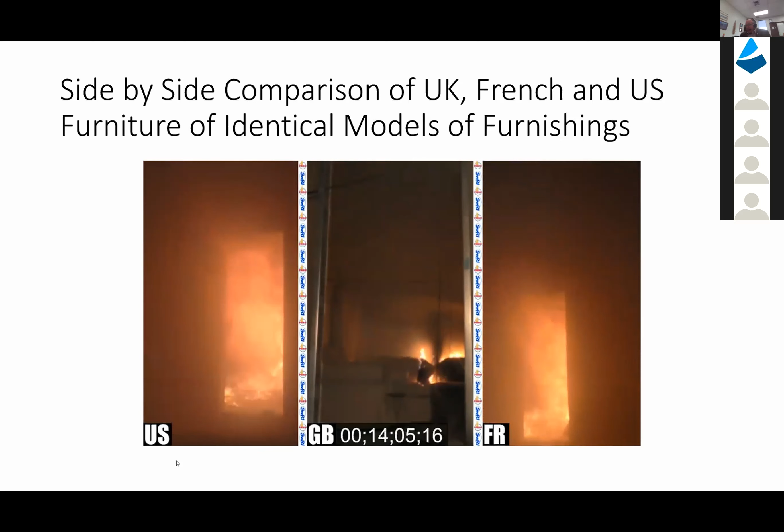This will eventually reach flashover, but it takes about 18 to 20 minutes to get there. Whereas the other rooms are completely burned out by the time the center room, the Great Britain, UK room, reaches flashover. And there it goes.

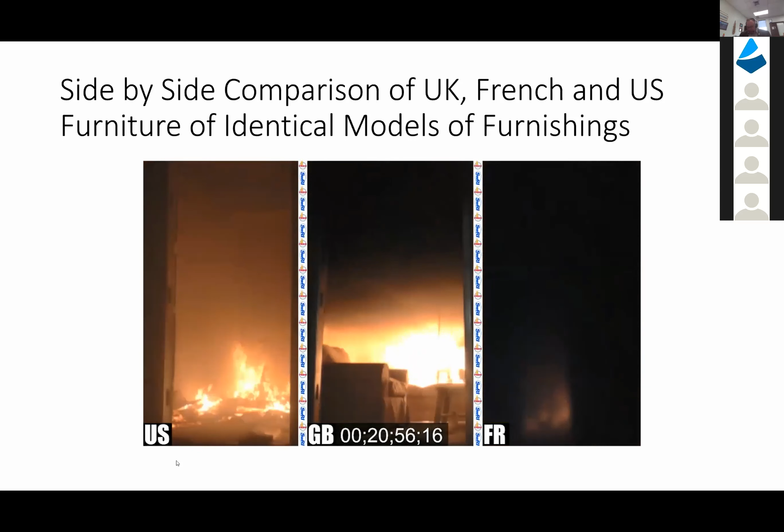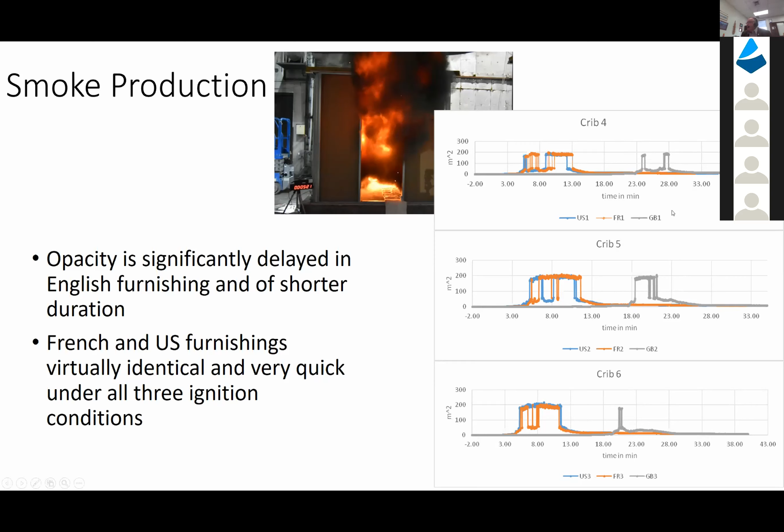So opacity measurement, you see the same sort of effect. You're at 23 minutes before you get any obscuration with the crib 4. It's about 18 minutes and about 19 minutes for cribs 5 and 6. What that really means is the air is clear enough you can see your way out of the room, and escape easily. It's a very important factor as far as escaping the building, what you can see to get out. So opacity here was delayed significantly for the UK room, which has the highest standard for fire retardancy in furniture, and obviously is a pretty good standard.

So smoke characteristics. You can see that we have white smoke and black smoke that are developed as the burn progresses. The white smoke has a very different chemical composition than the black smoke. The black smoke has a lot more PICs, and as a result is a lot more toxic. You can see that transition occurred in the previous slide at 17 to 19 minutes for the English furniture, whereas the French and US, it was 3 to 4 minutes into the burn.

If you think about what your fire alarm in your house would do to go off, you're basically just waking up when the smoke is heavy in the room, there's lots of heat, lots of fire, and you're unlikely to escape a US or a French constructed system, whereas you have plenty of time to get out with the UK. Again, as I said, the white and the black smoke are very different chemically, and we'll look at that.

Just looking at FTIR analysis of 2 locations within the room, we see very different performances of the French and the English room, the UK room, are shown. You can see that you're extremely toxic in about 7 minutes for the French room. The carbon monoxide goes through the roof. Hydrogen cyanide is very high, whereas the toxicity of the UK room at the bottom sketch on the right-hand side, you can see that the toxicity of the smoke is much delayed. You're all the way out to 20 minutes before you see any toxicity at all in the smoke.

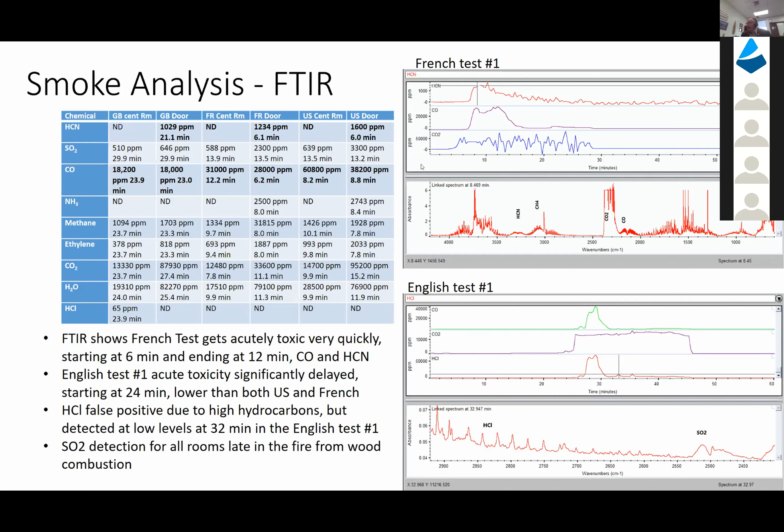So obviously it's much easier to escape. You have more time to do so. And the toxicities in the French room are enough to be lethal with basically one breath knocking you down.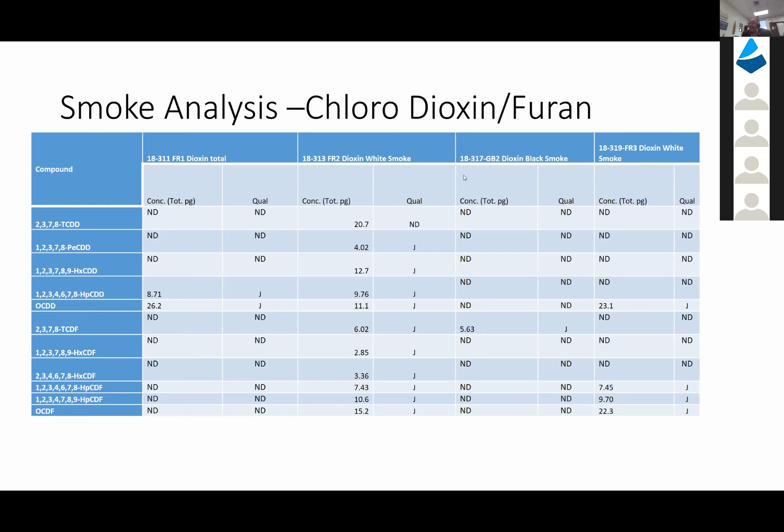So we wrapped that all up and published all that work. And then we actually did a toxicity study, because we collect full smoke samples over the entire duration of all the burns, and did cell line exposures looking at toxic effects. That's published under a separate cover.

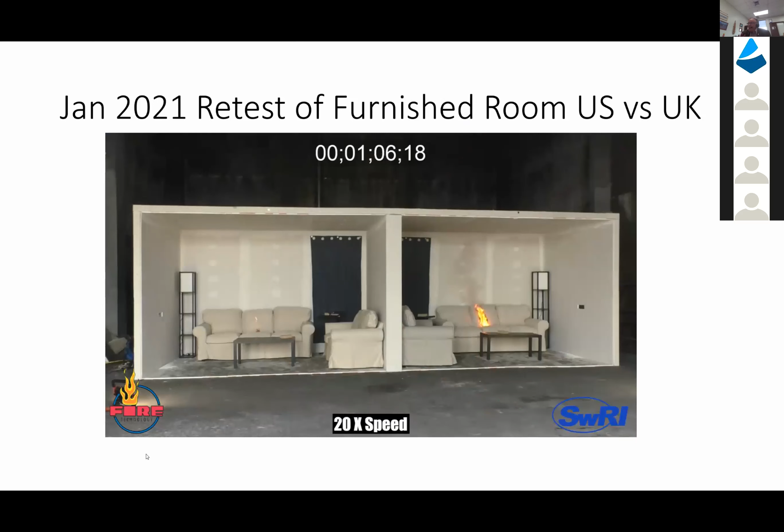But we actually got to repeat the fire tests recently in January, and we did it differently. Instead of using a standard 9705 room, we had the entire long wall open, and we were looking to see if that would affect the way the room burned. Interestingly enough, it didn't at all—we got about the same results as far as flashover.

And you can see that we put out the fire on the left, which was the British room, with a fire extinguisher, whereas we had to use a hose stream to put out the one on the right.

So the conclusions: country codes do play a critical role in fire safety for furnishings and home, especially furniture, which has so much energy content. The BS 5852 standard is probably the best furniture standard in the world. We see at least 4 times the performance in the amount of escape time for the BS 5852 rooms.

You can also see that the smoke toxicity in the highest flame resistant case actually had the best performance for smoke toxicity. The lowest toxic smoke was produced both for the polyaromatic hydrocarbons as well as for carbon monoxide and hydrogen cyanide. So this is acute toxicity as well as chronic toxicity. The fire gases that will knock you out and kill you, the narcotic type gases, are much lower in the UK room, and as well as the PAHs, which could give that long-term health effect, were much lower.

So fire retardant materials actually do produce less smoke, and they're more highly protective in the English furniture. So it's a much more survivable type fire. So the process that we see going forward with people trying to eliminate fire retardants from home furnishings is probably ill-advised. The technology does add value and reduces risk from fire.

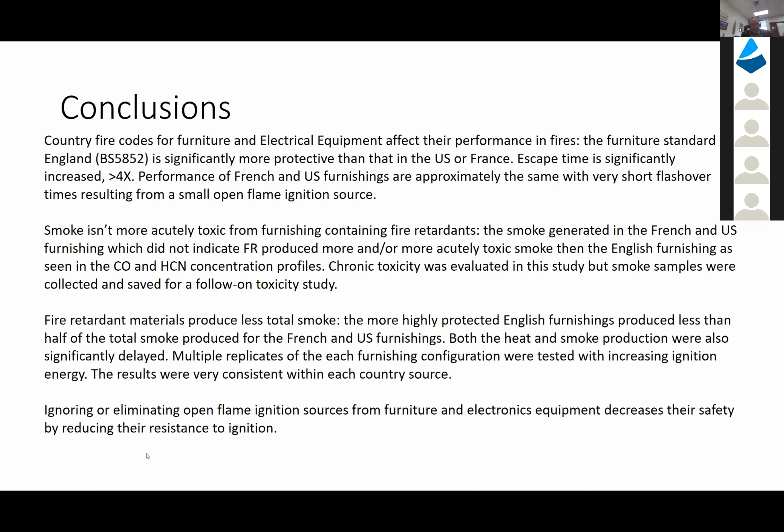Thank you very much, Matt. I think it's a very compelling argument for the value of flame retardants in application, and therefore that's why I find this data so fascinating. We wanted to include it in this group of presentations.

I'm trying to see, we have a question. Uh-oh. I have a... it just said my first name. There it is. Oh, okay.

Yes, here it is: Do you know whether these furnishings were flame retarded by halogens or non-halogenated flame retardants? We did go back and analyze—ammonium polyphosphate was used in the UK. There were no halogens in those furniture.

Were there halogens in the French and US furniture? No, they had no fire protection that we could detect at all. The televisions that were in the rooms did have brominated fire retardants in them.

Okay, thank you. Let me see, how are we doing on time? Hey Maggie, if you want to roll right into the next speaker, we can go ahead and do that. I see a question coming in right now from Bernardo, so maybe we'll give him a second. Okay.

Excellent presentation, Matt, very interesting. Thank you, well, it's very visual, you know, that's what we need. We need to have these kinds of examples to show the value of flame retardant technology in polymers.

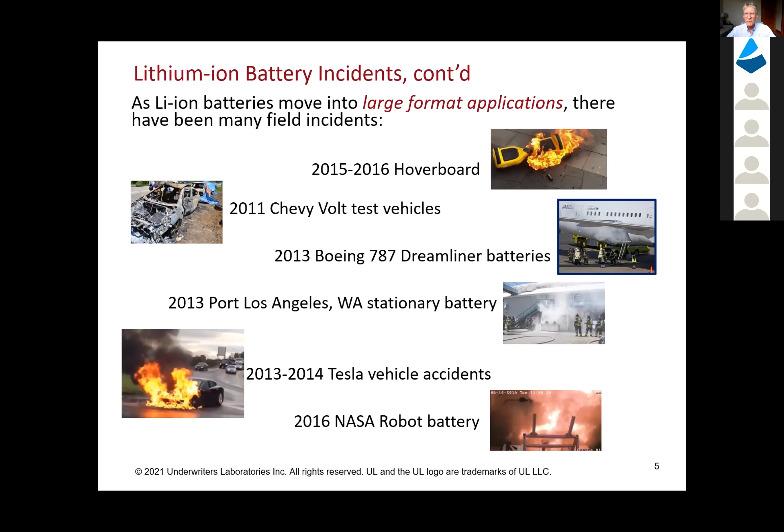As I mentioned, the Consumer Product Safety Commission in the United States has direct jurisdiction around these kinds of products. I've taken it upon myself to study these recalls, and they've had in excess of 150 recalls involving 21 million units of battery-related technology since 1990. The problem here, among other things, is that these incidents were driven by small or large fires, injuries, and sad to say, worse - deaths and property loss. The problem is that generally the guidance given is to return suspect or identified devices to the manufacturer, not thinking that that's going to end up back on an aircraft. I'll get to that in just a minute.

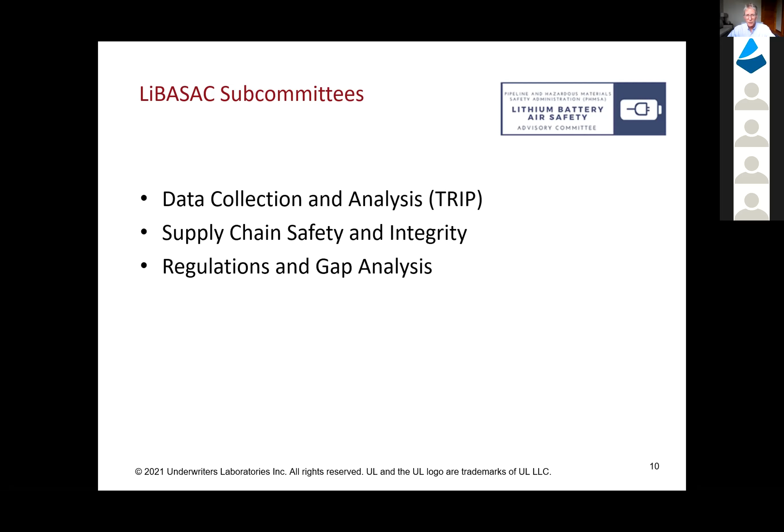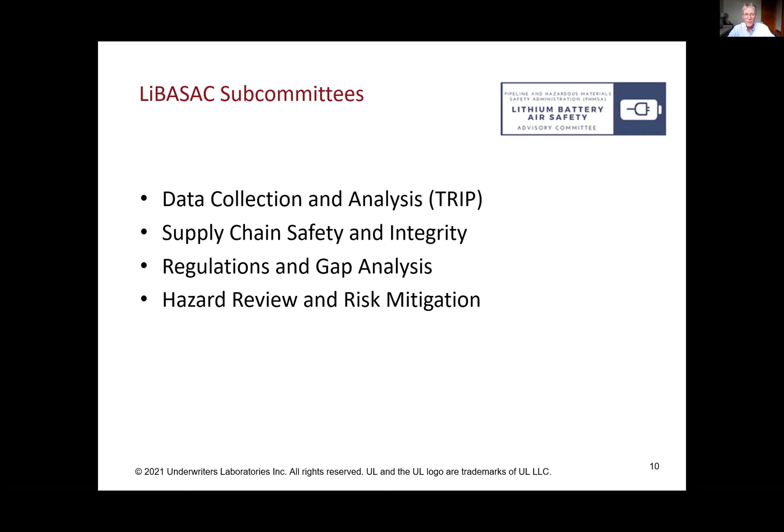The structure of these subcommittees is actually quite logical, because if you can't logically talk about aviation incidents in very specific form in the first subcommittee, you can't address the problem. So we've developed a very enhanced program, which I'll get to in a second, which talks about when, where, why, and how these battery incidents happen.

The second, in my area, with the team that we have, is to start with battery chemistry and technology from way back in design, raw materials, manufacturing, quality control, that leads to the shipment that ultimately ends up in cargo, or in the device that ends up in the passenger's pocket or belongings.

Next is the regulations. We're really looking here at how implementable these regulations are. And in fact, it's sad to say, but many of them are unrealistic when you look at state of charge. Are the major carriers really going to open shipments to validate that the state of charge is 30%? And the answer is no.

And last is hazard review. We're going to be looking at the intrinsic reactivity of batteries during failure and how we mitigate the risk. Mitigation of risk, please understand, has a lot to do with advanced materials development.

So let's talk about incidents for a second. TRIP is an acronym that stands for Thermal Runaway Incident Program. This was developed originally at United Airlines, went to American Airlines as a voluntary program, and then moved to UL. The not-for-profit side of UL has invested tremendous amounts of money to move this forward, to make it as comprehensive, effective, and user-friendly as possible.

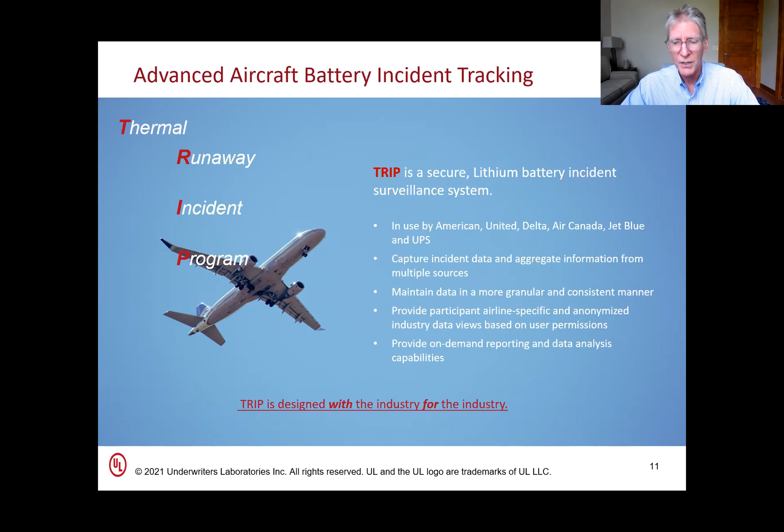In the supply chain, again, which I referred to a minute ago, we look at all aspects of battery technology supply chain to understand, can we obtain more information from the battery industry to enhance decisions that are made at the speed of commerce in terms of shipping batteries, or whether passenger airlines should accept or reject battery technology as passengers present.

It could be mobility aids, consumer electronics, or whatever, but in fact we see 2 separate ecosystems involved here: the dynamics of passenger airline battery safety and cargo airline battery safety. Now I'd like to show you something to demonstrate how complex this has become. In new shipments, we're talking massive cargo, and battery cargo is forbidden from passenger aircraft, so in many ways what I'm referring to is massive cargo operations.

So under new shipments, we're looking at cells, batteries as components, or battery-containing devices. However, in the 30-year arc that I mentioned earlier, the technology is so mature that we're getting into what I call the many R's: returns, repairs, reuse, repackaging, repurposing, recycling, or resource recovery.

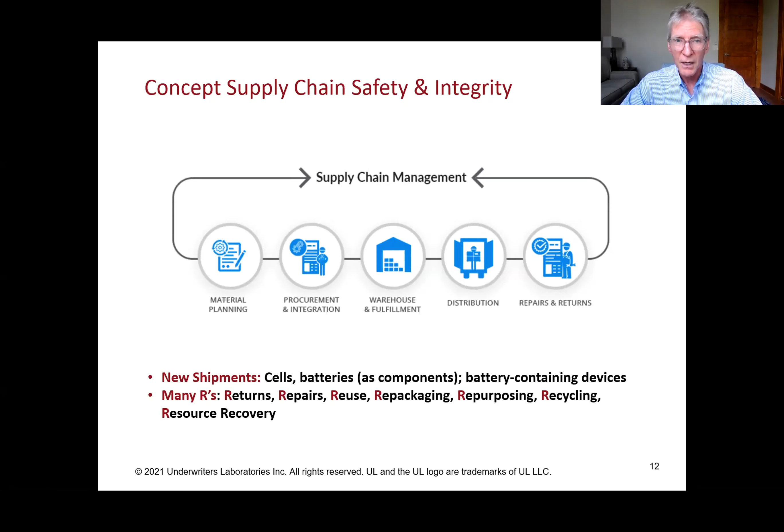It just came to me one day, dealing with retailers and so on, that reverse logistics is presenting an entirely new massive problem. Can we invent new fire-resistant and economical packaging boxes that would mitigate some of the risk? That old adage, if it fits, it ships by the US Postal Service, is quite a nemesis now, because a lot of batteries are being shipped via reverse logistics and the consumer or shipper is not declaring what it is. So undeclared shipments is a massive threat in airline safety.

What we are trying to do in this Federal Advisory Committee, through the supply chain and other subcommittees I mentioned, is figure out what can we do to move the axis towards a safer state. It's not going to be any one activity. It's going to be a multiplicity of improvements that will lead us from the unknown to the known through testing and certification, validation and verification.

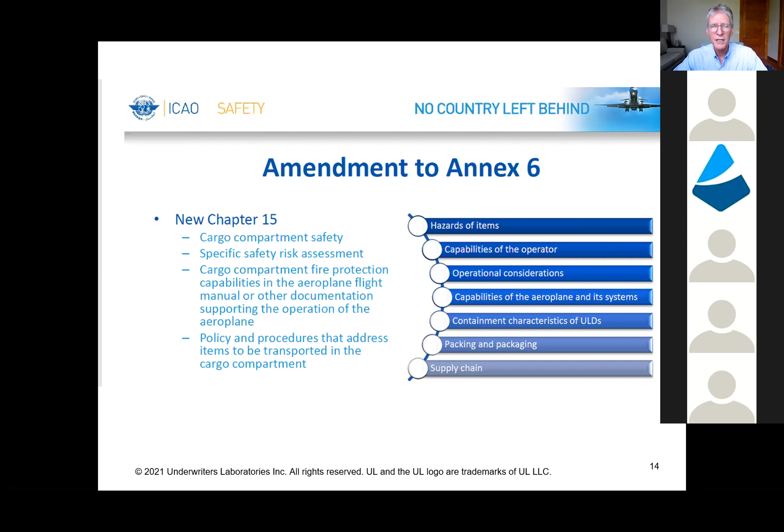So in conclusion, this technology is enormously exciting. It's an essential part of our lives, and it's not about to stop. Batteries are going to get bigger, more energy dense, and more diverse, driven by applications across everything up to stationary energy storage. Those devices have to be shipped internationally, and battery technology represents one of the major hazards in terms of dangerous goods to flight operations. The technology is complex, however we do believe there are ways we can further characterize batteries in terms of testing to failure to quantify the hazard.

Testing to failure is the single greatest opportunity towards determining what precautions you need. For example, I use the analogy of what's called flashpoint is to liquids as testing to failure is to batteries. As soon as you know what it is, you know how to adequately handle and ship it.

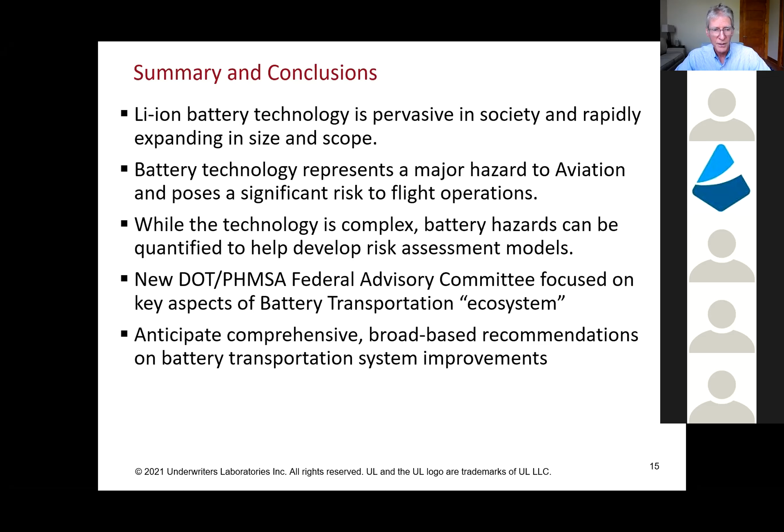The new PHMSA DOT Federal Advisory Committee has a duration of between 2 and 6 years, and we're really focused in on this ecosystem. We anticipate broad-based recommendations to Congress, and we're giving interim updates about every 6 months to address this issue, and members of Congress are deeply concerned. Thank you very much, and I appreciate your attention and look forward to any questions.

Tom, thank you so much. As always, an excellent presentation. There was a question, but it's kind of disappeared. Was it answered? I wonder. The question really was from Bob Young.

It was about, would a, I guess you'd say, metal container, some type of container to protect the batteries with an inert gas, or would there be self-oxidizing? Is there any?

It's a really good question, I appreciate it. I would say the answer always comes down to cost and weight. The container is a problem for air carriers - it adds weight and doesn't add a lot of value. I'd say lightweight, high endurance materials, ones that are cost effective, are absolutely the way to go. Metal containers are a concern - even aluminum melts at 900 degrees, and I can burn a hole through it with a battery. So there are some concerns. Advanced materials really are of great interest to all of us, and so I encourage innovation.